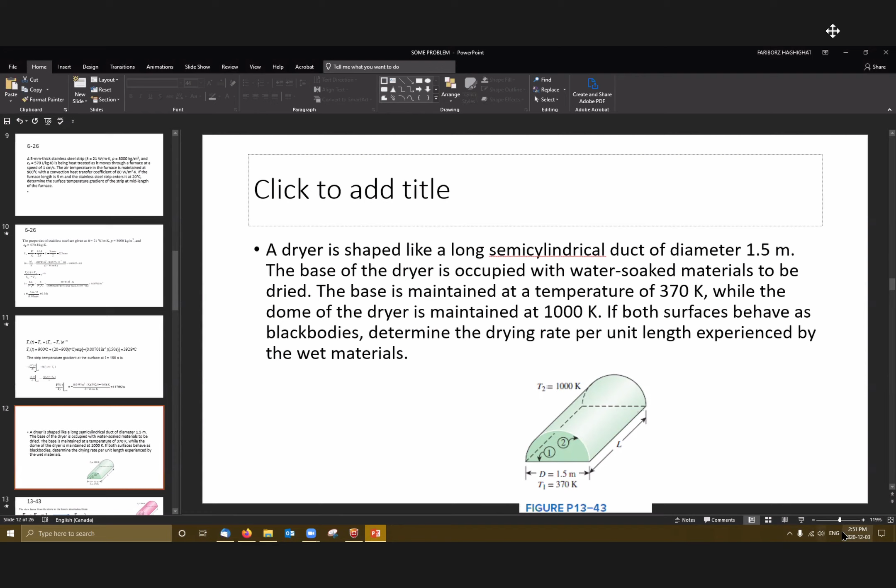We could find the amount of energy emitted from the surfaces? Yes, there are these two surfaces, and we consider one covering the other. Therefore, there is only energy exchange between surface 1 and 2. There is no other body involved.

That's why he mentioned it's long. Therefore, this cylinder is long, therefore we can ignore energy losses from the ends. And so we can write the reciprocity rule: A1 F12 equals A2 F21.

Now, what is the shape factor from 1 to 2? Would it be 1? Are you sure? No? Yes, you should be sure. Yeah, I'm sure, because whatever is emitted from surface 1 will eventually be captured by surface 2.

Look at the picture, because this is flat. If you write the summation rule, okay, let's forget about it - let's write the summation rule for surface 1: F11 plus F12 equals 1. Do you agree with me?

Yeah, okay. Therefore, if you ignore the losses from the ends, there are only two surfaces, 1 and 2. Therefore, I'm going to write the summation law for surface 1: F1 to 1 plus F1 to 2 is equal to 1. Now, surface 1 is flat.

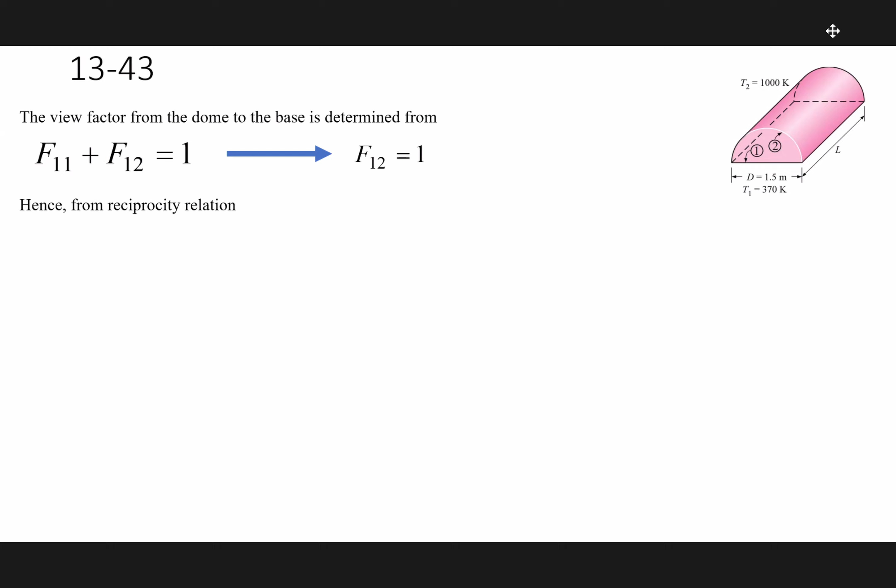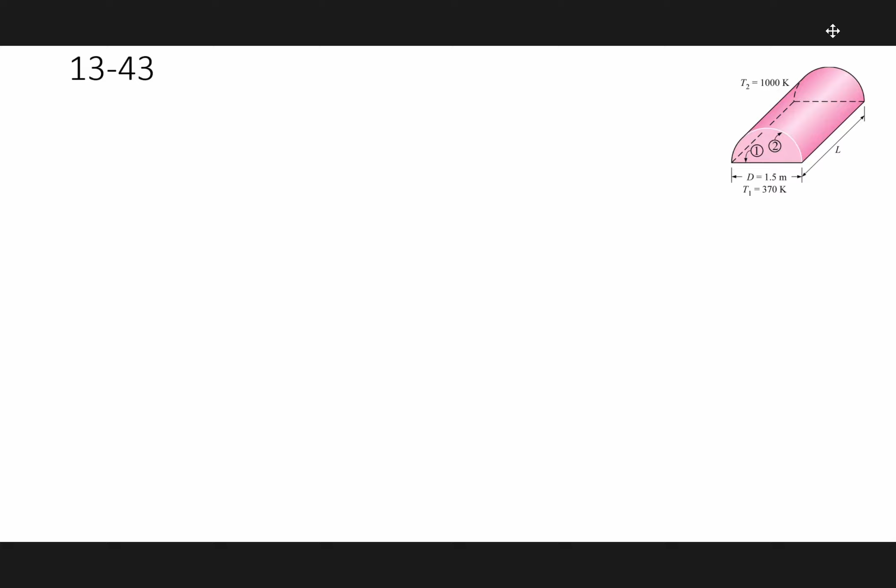Yes, the problem comes from your textbook. You should have your textbook, sir. Okay, I do. Oh, is it 1343?

Okay, any question? One, two, three. Let's go to the next one.

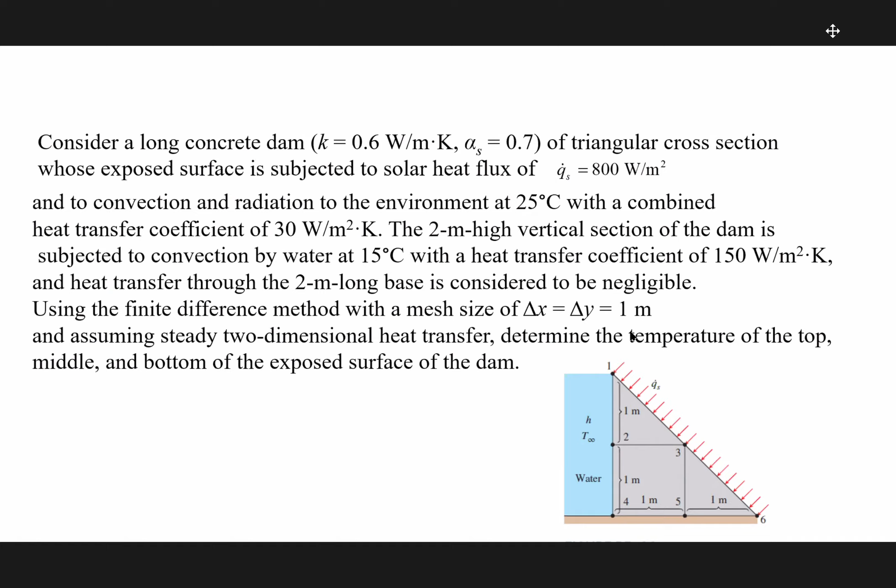Did you get this equation? Yes, yes. Does anybody have any question on this part?

Should we count the convection from above as well? I mean, there's no convection above here, there's no surface. Oh yeah, true, sorry, my bad. Okay, does anybody have a problem with this part?

This is only referring to this length, because from here to here is 1 meter, from here to here is 1 meter, but this is a triangle. In case you don't know what I'm talking about, let's go to basic mathematics. You have A, this is sine of beta equals A over B. You're trying to calculate B, so B becomes A over sine of beta, okay?

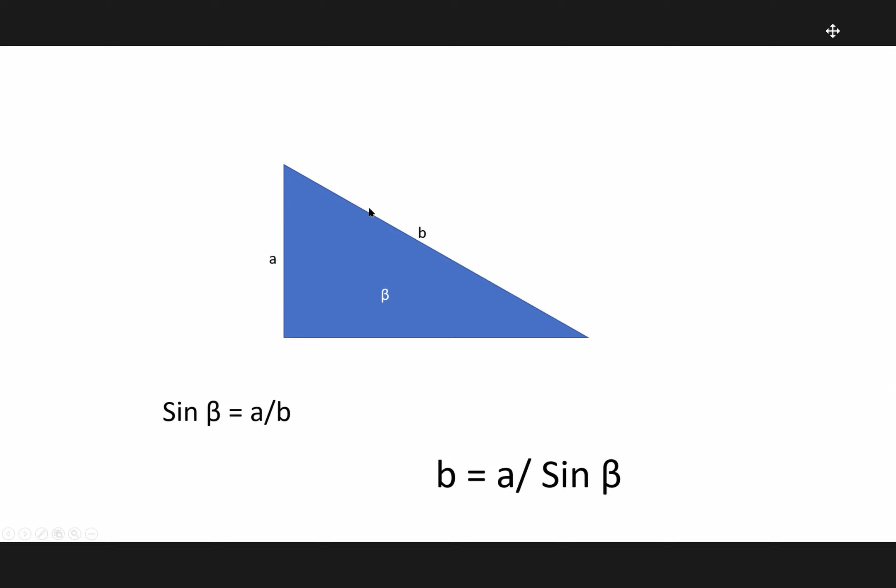Therefore, the sine here is because we know this length is L over 2 in our case, and we have the angle beta, so we're trying to calculate the length exposed to solar radiation and convection. That's typical: we have convection, conduction from here to here, and the way we have it here, okay?

Let's go to node number 2. The usual, we have this here.

Could you please write the equation for node number 3?

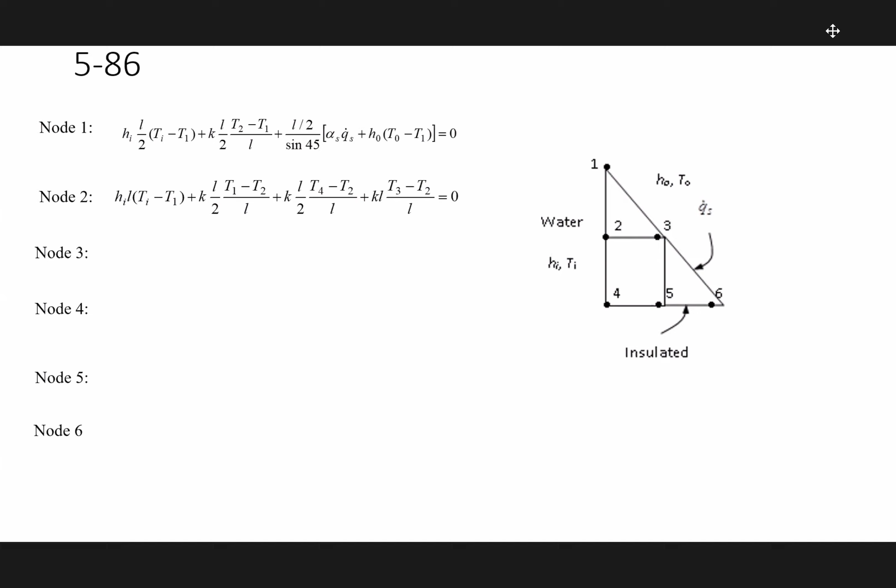Okay, I will show you all the equations because we need more time. For node number 5, it's mentioned it is insulated. To simplify, you can assume this is symmetric, the node here is also 3, because it's insulated it means dT over dy is equal to 0.

It means there's a node here that has the same temperature as 3. This way you can consider this an internal node, and you can easily calculate this plus this plus this plus this, divided by 4. That's exactly the point here, okay?

And 2T here because we assume it's symmetric, and you're writing for node number 5. Node number 6 is the same, again we can write this one, okay? For practice, the idea here is to be able to identify the elements involved and write the equation.

Professor, are we going to have to solve this type of problem in transient heat conduction in the final? No, I'm not going to give you five equations. I'm trying to identify... No, I mean for the transient one. Transient? The i plus 1, yeah.

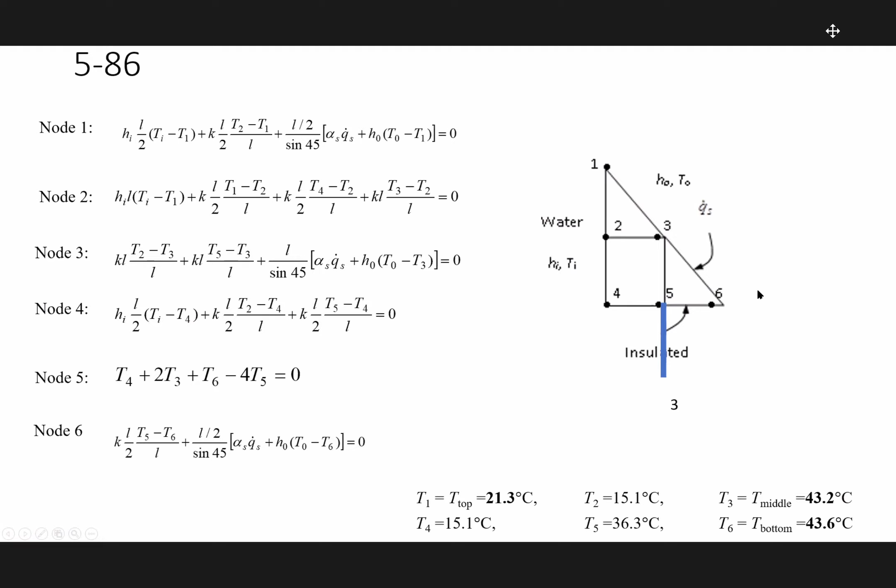And here is mainly receiving solar radiation. Again, look at the problem. If you have any question, please ask me. Let me go to the next question because we have two more questions left.

Again, here we give you another 10 minutes to think about it and try to do it. I'll give you 15 minutes. Please read it, do not rush, and try to find how far you can go. I'll go for a walk.

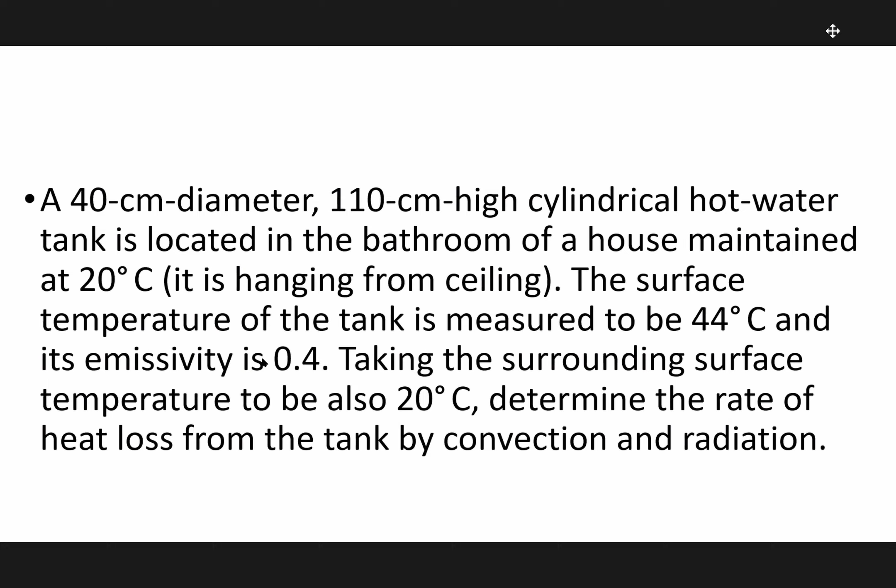Look at the problem here. Write down first, the diameter is 40 centimeters and the height is 110. We have R, D, and L. We have the temperature of 44 for the surface, 20 degrees for air and the surrounding, and emissivity is 0.4. Let's do the problem together.

The temperature here is the average temperature. 20 degrees is the environment that we have, and temperature for surface is 44. We add them up together, becomes 64, divided by 2, becomes 32. And we can look at the physical property.

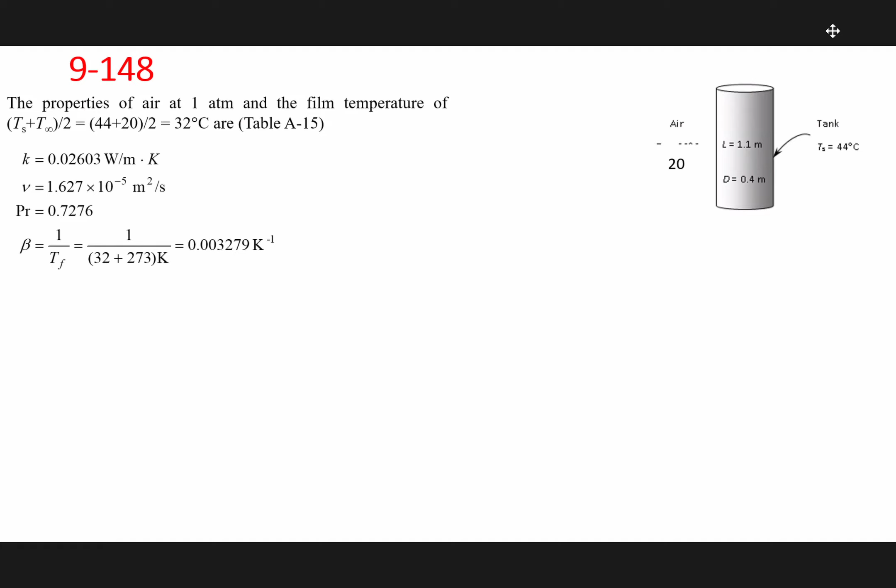Now we identify the processes in natural convection. Therefore we calculate the Grashof number. Let's look at which surface first. Let's look at the length of the surface, okay?

Now we calculate here, and the length is 1.1. We have the temperature difference of 44 minus 20. We have length is 1.1, and then we have physical property, and we calculate the Grashof number. Check, I remind you, this is characteristic length to power 3 in the Grashof number, kinematic viscosity to power 2. Keep in mind, make sure when you are doing it, always do not forget. And then it becomes 3.883 times 10 to power 9.

Now which correlation should I use? Now I need to go and calculate the Nusselt number. What should I do? Should we get the Rayleigh number? You multiply by... should we get the Rayleigh number multiplying by Prandtl number? Okay, we calculate Rayleigh number.

Now, which correlation should I use? Yes, louder please. For vertical plate, right? Therefore I have to go back and look at table 9.1. We have a vertical cylinder, and it mentions that if diameter is bigger than this, we can assume it's a vertical plate.

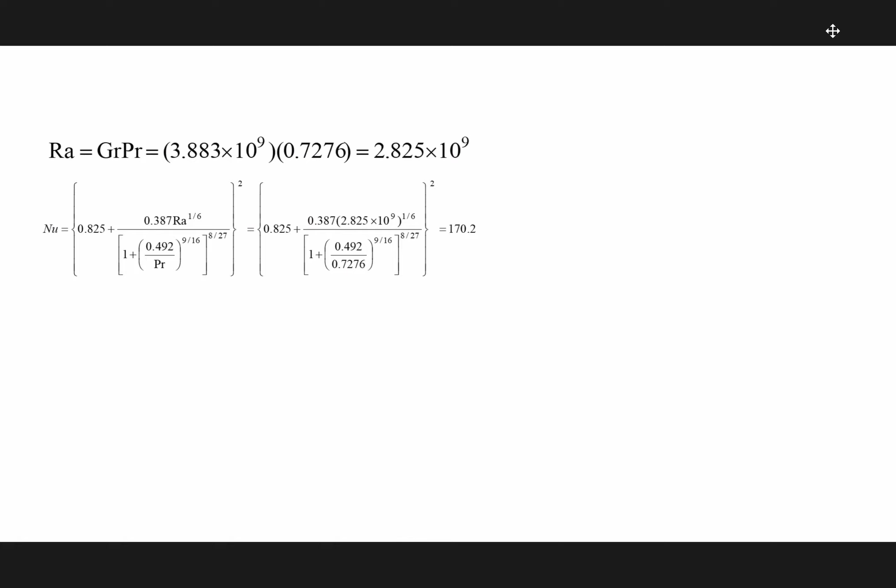Okay, then you go, you have the Nusselt number, and the characteristic length is L, and you have conductivity, and you can calculate the heat transfer coefficient. The heat transfer coefficient is 4.0, right? It means your natural convection is 170 times higher than conduction. That's the meaning of the Nusselt number. You have H, you have A, now you can calculate the total energy exchange.

As I mentioned, it's a combination of natural convection and radiation. Therefore you write this equation that you have. So the surface area here, you didn't include the top and the bottom? No, sir, it's hanging. No, sir, it's only the sides.

But it's hanging - it has something else it means. Because this is only from vertical, showing convection from the side. And the top, we have to deal with it differently, sir. Okay, therefore, this is by convection from the side. Okay, thanks, right, it's only from the side.

Now we have to look at the other two surfaces. The other two surfaces are flat, heated upside, flat, heated downside. So we use horizontal plate for the top and bottom then?

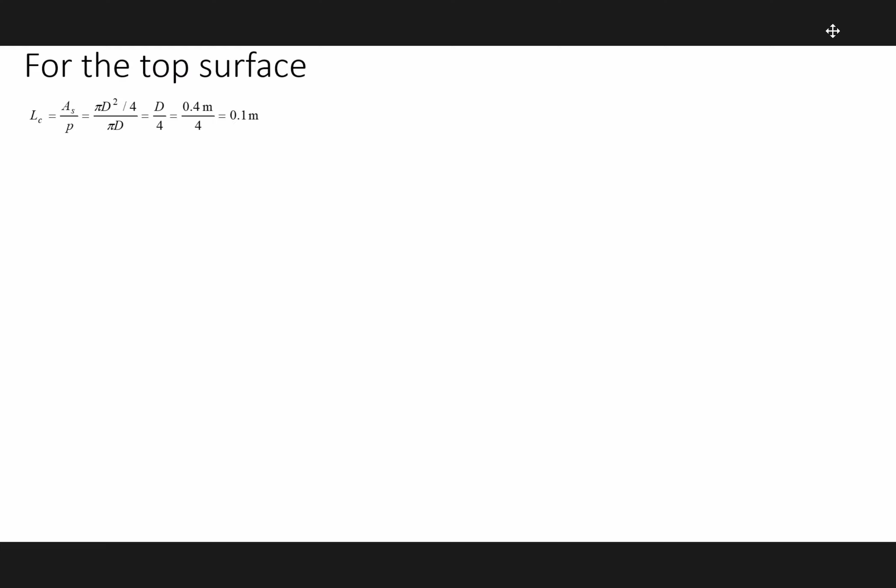Now you have the characteristic length. Now we have to go back and calculate the Grashof number, because the Grashof number is a function of the characteristic length. Before it was 1.1, now it's 0.1. We're going to calculate the Grashof number. Keep in mind: Grashof number equals temperature difference, beta, G, characteristic length to power 3, over kinematic viscosity to power 2, and you can see this is less than 10 to power 9, okay? Multiply by Prandtl number, that we did it, therefore you find Rayleigh number directly.

Then we go to table 9.1 and look at table 9.1. This is surface, top surface. Therefore we look at that part and use this equation. It's easier because this falls exactly on the range of the first one, okay? You can use also equation number 3, there's nothing wrong, but here you can do that, okay? And you calculate the Nusselt number.

Again, we do have the Nusselt number, we do have conductivity and characteristic length, we can calculate the heat transfer coefficient. You can remember now we are talking about the disk. We are talking about disk, therefore this is the area of the disk. If you notice, this is only - we're looking at the plate on the top. The plate on the top is a circle, therefore this is the surface area.

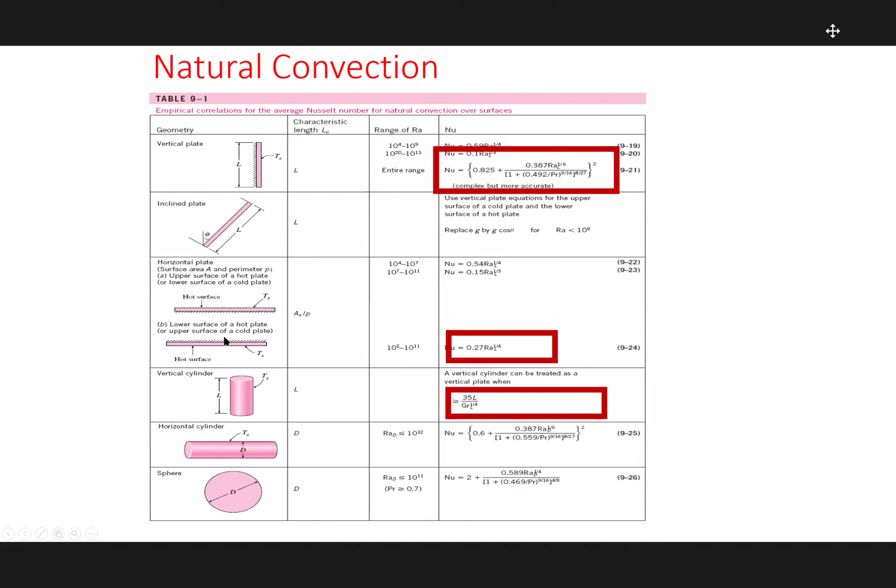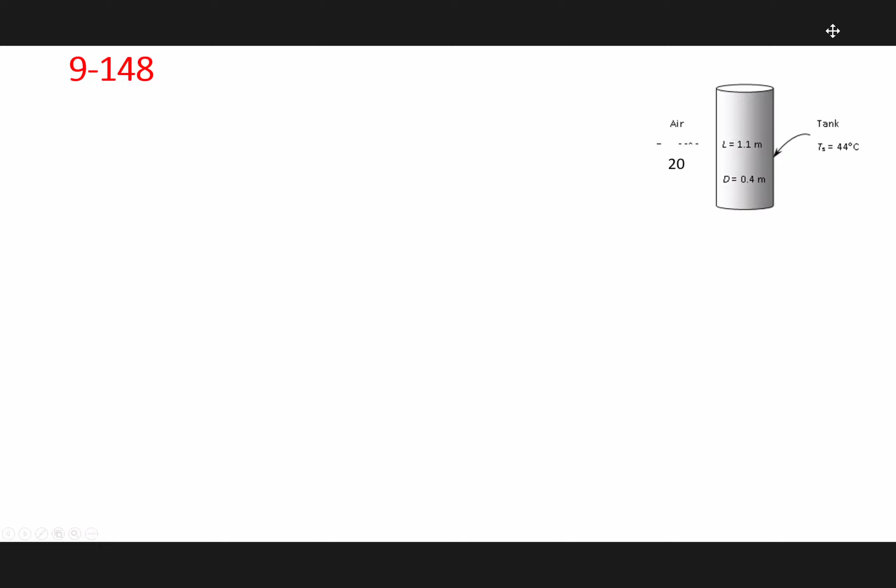But this insulation, the whole concept they're using here, is that there is no energy exchange between this plate and the liquid inside the tank. The tank is full of water at 40 degrees, therefore there is no energy exchange. But in your application, if I put insulation on the top, and the temperature on top of the insulation is still 30 degrees, I still have energy exchange by natural convection.

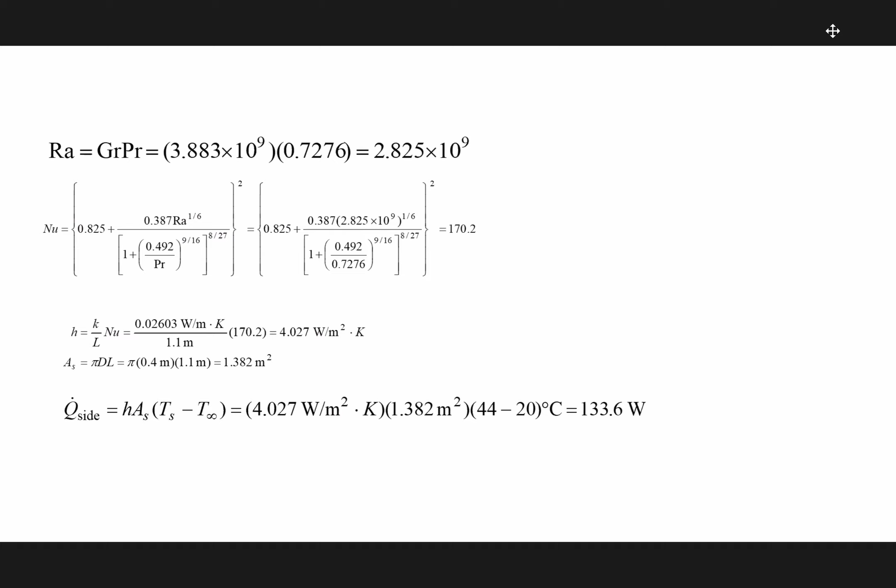Okay, therefore we calculate here, and this is the value we find. Now we go back. This is the amount of energy exchange by convection from the side surface of the tank. We have to go back and repeat the same thing.

So here we have to repeat the same thing for the bottom plate. That's why I mentioned it's hanging, okay? That's why I added that statement - the bottom is also exposed to the air. If the tank were on the floor, there would be no natural convection.

But since it's a cylinder, the characteristic length is the same, so the Rayleigh number is the same. The only thing we have to check is the other formula for the bottom plate. Do you agree with me? The bottom plate has the same characteristic length, and since the temperature is the same, we end up with the same Rayleigh number.

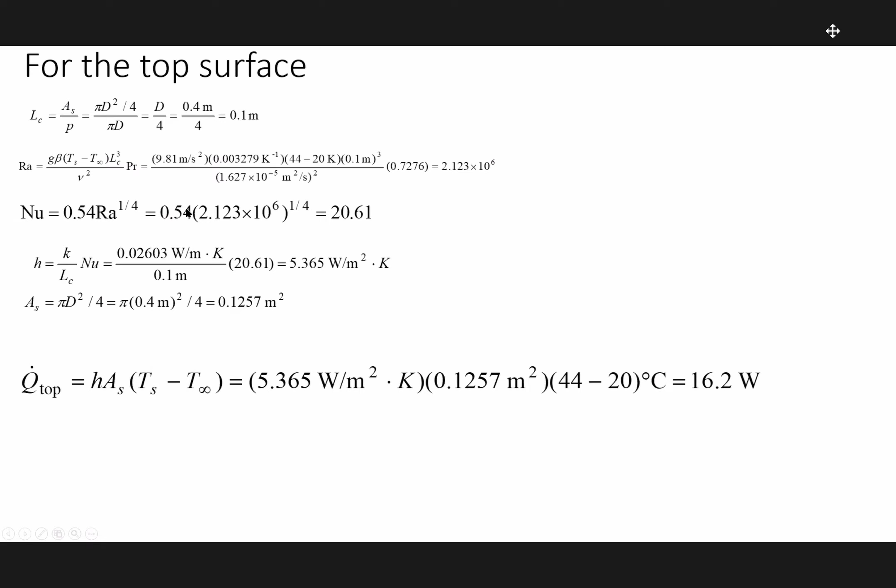But now we have to go back and check the correlation for the bottom. And if you do that, you will see this is the correlation for the bottom plate.

Again, as your engineer, look here: from the top it was 20.61, for the bottom it's 10. In case your calculator makes a mistake and you find this is 100, use your judgment. It has to be less because the top plate is hot, so there is less convection on the bottom than on the top.

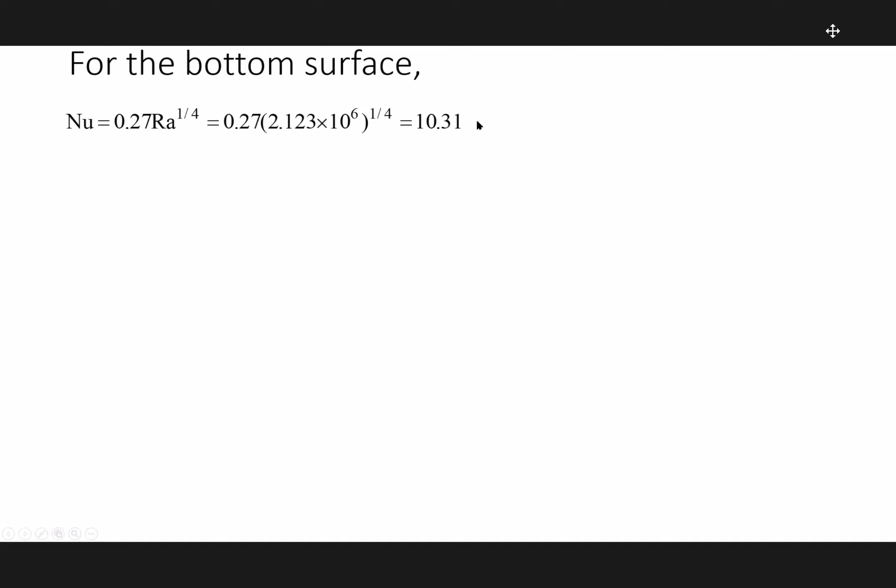Use your judgment as you go through the problem, and if you find the answer, just think for a second.

And again, we find this one, and we calculate, and therefore we end up with that value. By convection from the side, we calculate. From the top, we calculate. From the bottom, we calculate. This becomes this value.

And the same thing, we can calculate by radiation. We have the temperature of the room, the wall of the room, the surrounding is 20 degrees. And this is the total area of the top, side, and bottom - we add them up together. This is the area that we have. Top and bottom are the same, this is from the side, and this is the emissivity here.

And since this tank is inside the room, the shape factor is equal to 1, because whatever is emitted from the cylinder will be absorbed by that. That's why we don't have any shape factor here - we have it, but that shape factor is equal to 1.

Any question, ladies and gentlemen?

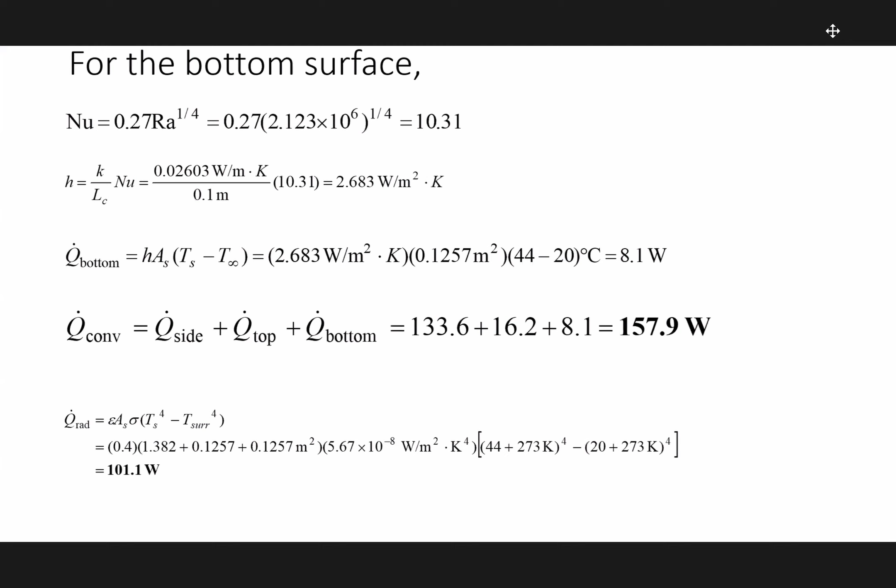Oil at 15 degrees is being heated by a saturated steam at 1 atmosphere in a double pipe heat exchanger. We are dealing with the oil at 15 degrees heated by saturated steam, in a double pipe heat exchanger.

If the inner and outer diameter of these two pipes is 3 centimeters and 5 centimeters, and the oil enters at the mean velocity of 0.8 meter per second.

Now he's giving you the inner tube may be assumed to be isothermal. That's why he mentioned saturated steam. Therefore, he assumed this temperature is constant, and the outer tube is well insulated.

Okay, therefore we have the inner one at 100 degrees, outside well insulated. Assume fully developed. Okay, therefore we can assume now it's fully developed, the velocity profile is established.

Determine the tube length required to heat the oil to the indicated temperature.

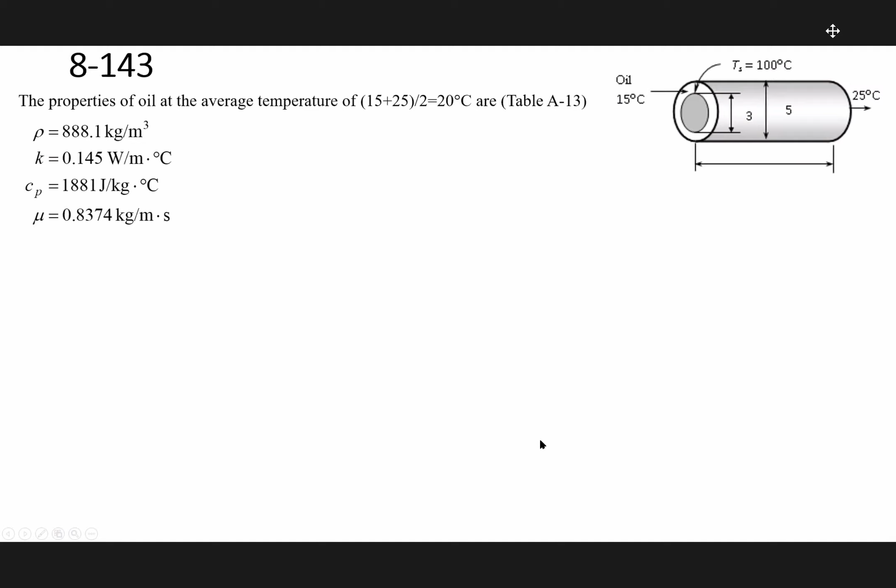As we go back, therefore we calculate this one. We have the surface area. I don't know what procedure should we use, which technique should we use.

You see, should we assume constant surface temperature? But what procedure should we use? What is unknown? The H. What is unknown, my friend? He's asking you to calculate what?

He's asking you to calculate the length. Okay? He's asking you to calculate the length. Determine the tube length, this is unknown. He wants to see what should be the length of this tube, the temperature increased between 15 and 25.

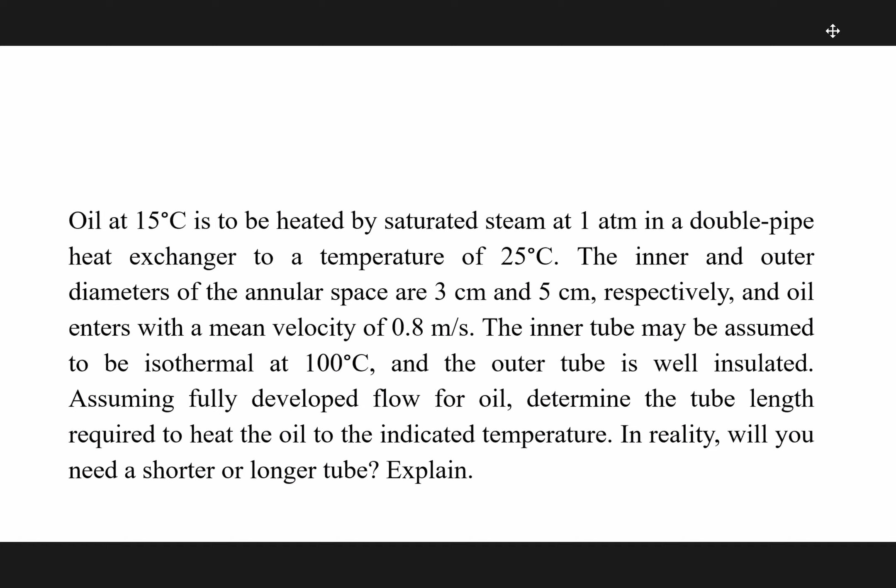And also remember, we are talking about constant surface temperature, the fluid comes and so on. Therefore, we have to calculate also mean log temperature. Read the question to find out what is exactly given.

I know the area. If I multiply, this is the area, the opening area here. If I multiply by the velocity, it gave me the volumetric flow rate. If I multiply by rho, it gave me the density. Therefore, I can calculate the amount of mass flow rate going here.

I know the temperature is coming in at 15, leaving at 25. We can calculate how much energy exchange. That's the energy exchange, but that's not the question. The question here is what is the length needed in order for the temperature to increase from 15 to 25. I want to see what should be this length here.

But this energy exchange is energy exchange from the steam to this one, is the convection to this fluid. Convection from here, because we assume the temperature is 100 degrees, and the temperature here is given to the fluid. This temperature is constant, therefore now we can use log mean temperature, okay?

To do that, first we need to calculate the convective transfer. You know, this is hydraulic diameter, and then we go back to here. We mentioned this is laminar flow, okay?

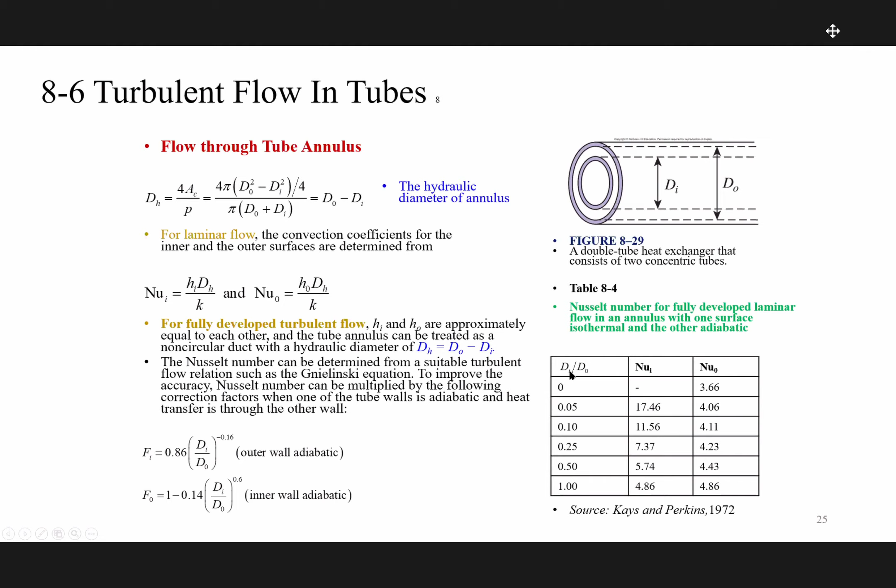Nusselt number for fully developed laminar flow in this one. That's why he mentions fully developed. We don't have to be worried. And based on the inside diameter given here, therefore we can find what value it is, this ratio, and find the value from this one, okay?

Therefore, let me go back. From here, we find this Nusselt number, let me see. And then we find this ratio, DI over DO is equal to 0.6. We go back to the table and we look at inside Nusselt number because we are interested in the Nusselt number within the interior surface of the pipe here and the fluid, because the fluid is going between these two. Therefore, this is for the interior tube, okay?

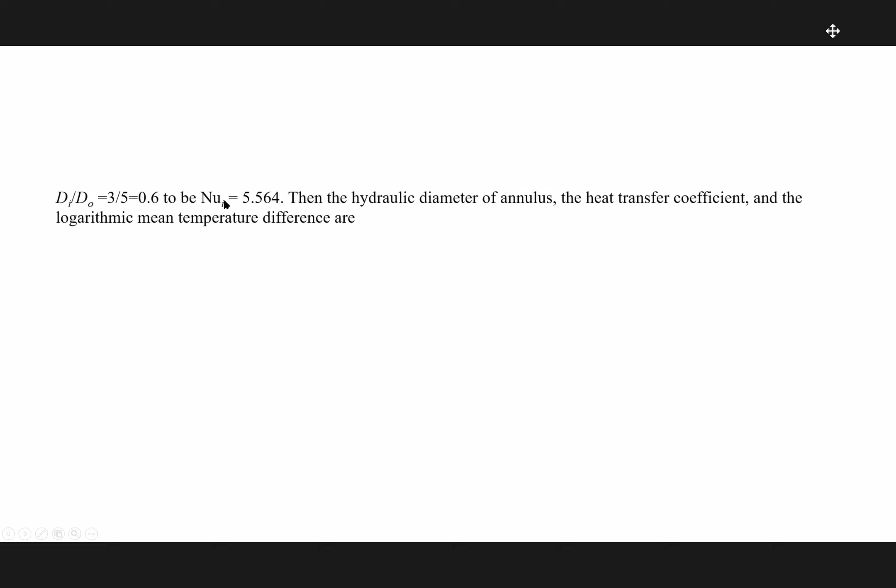Therefore, we find this value because it's fully developed laminar. This number is constant, and we know the hydraulic diameter, and then we calculate the value of the heat transfer coefficient. Now, the unknown here is...

...the rate of heat transfer, the rate, the length of the tube. The length of the tube: Q by mass flow rate is equal to Q with convection, okay?

But since the temperature is constant, we have to look at log mean temperature. I know the inlet temperature, I know the exit temperature, I know the surface temperature, therefore I can find this log mean temperature is equal to this one.

Now I can write my energy balance equation. I know how much the Q in exchange, I know that one. I know H. The area I have to calculate because this is the energy exchange between the interior surface of the pipe and the fluid, okay? Therefore I can calculate from here.

Q, this is the area. This is the energy we calculated by MC delta T. This is my H, and this is my delta mean. Therefore, this is the area become like this. Now I know this area for energy exchange. Therefore, there is a length in this AS that I can calculate, that one. Okay, therefore here there is.

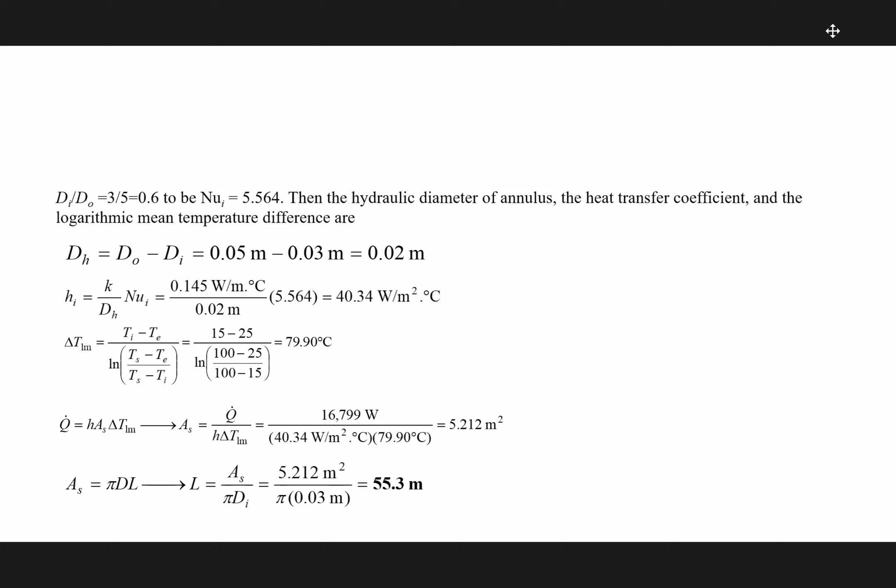Right here, let me show you one more time. Very easy: whenever they mention the temperature of the surface is constant, it means you have to use log mean temperature, sir. Okay, it was chapter 8, I believe. And whenever it mentions the temperature is constant, it means like this, sir.

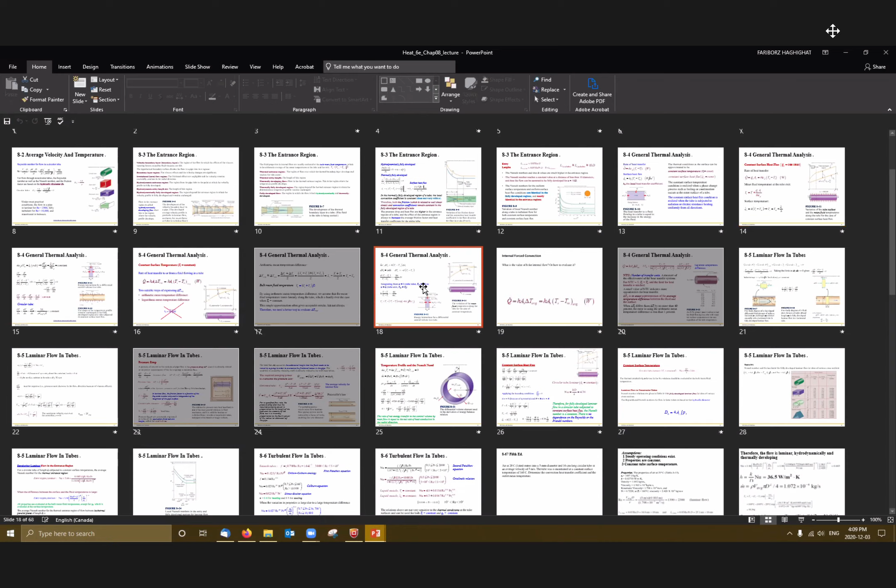There's a graph right here. Whenever the temperature of the plate is constant, it remains always constant, but the fluid comes in at 15 degrees and slowly increases. In this case, the temperature difference at the beginning is different from the end. Therefore, we calculate the log mean temperature in this case. Okay? Whenever you have a constant surface temperature.

Okay, thank you sir. No problem. Otherwise, when you have this one, it's easy.

When you have constant heat flux, it's easy, because constant heat flux means that your temperature of the surface is changing. This is the temperature of the fluid going on, and this is the temperature here. Both of them, the difference between them, remains also constant. In this case, you can use delta T as usual. But when it comes to the case of constant temperature, it's a different story.

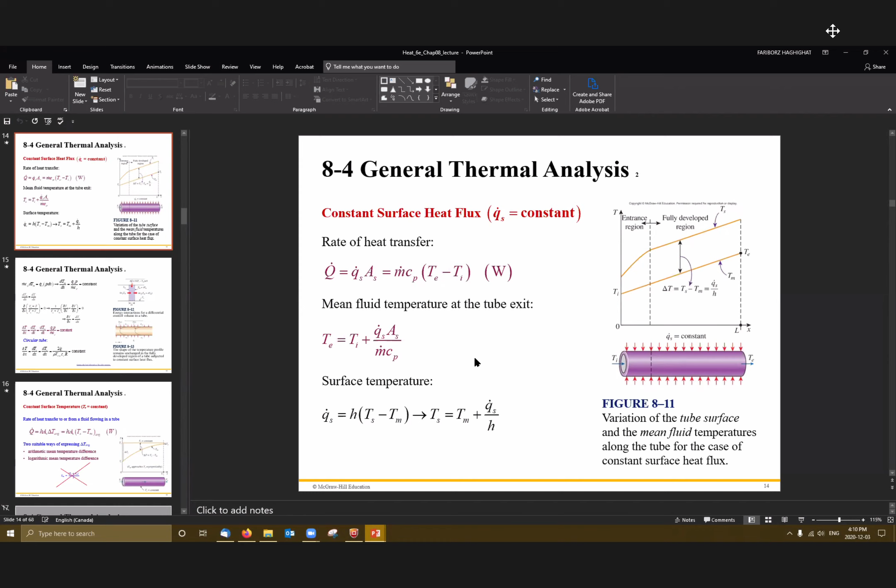Okay, thank you sir, no problem. Okay ladies and gentlemen, it was nice to have you. Work hard and hopefully everything will be okay.

But the only thing, please read, take your time, do not plug in the number immediately. As I always mention, it was nice to see you only for one term. I don't want to see any of you next term, okay? Thank you, sir, bye, thanks.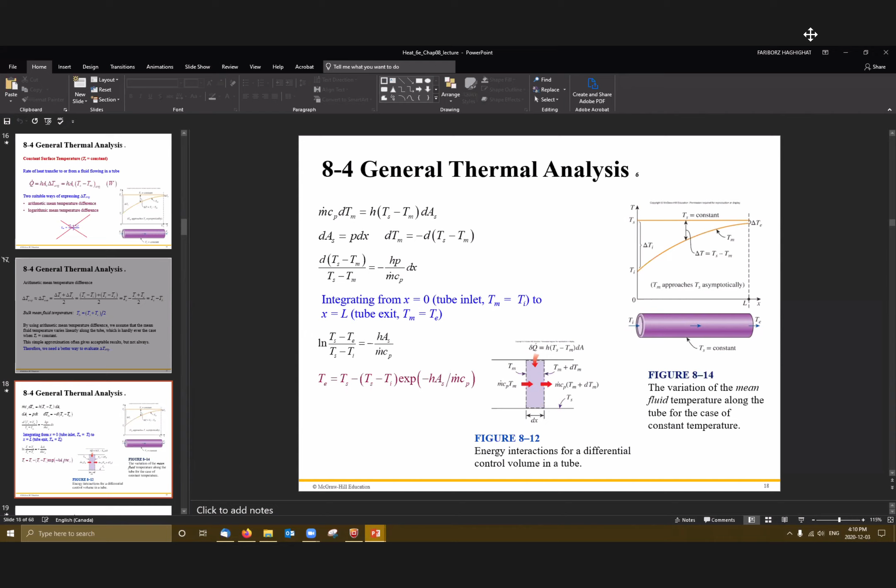Pass successfully, because this is enough for one term. I'm sure all of you know, but spend some time, read it carefully, understand the subject. Hopefully everything is going to be fine. Take your time, okay? Thank you. All the best.